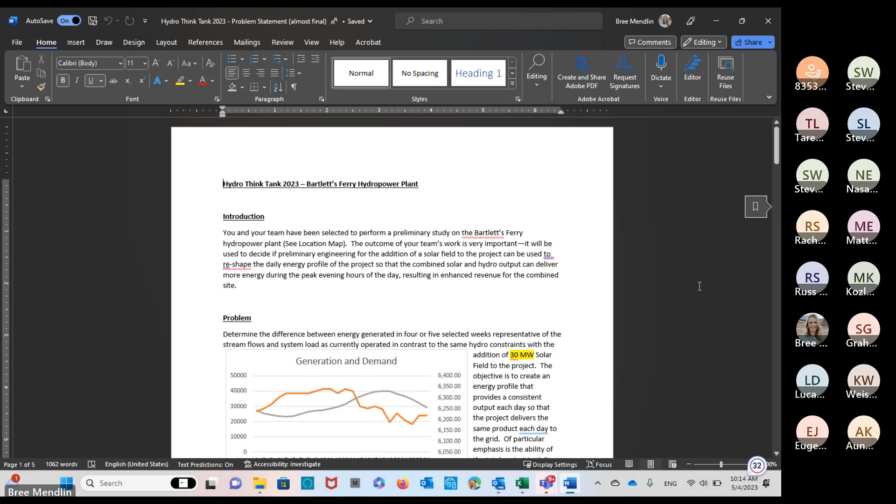Okay, I need to pull up something else. Sorry. Really did take some time to get ready for this. I'm just getting there. It's okay, it's early. Yeah.

Right, so click that. Okay, now we're all seeing the same thing, so I'm finally there.

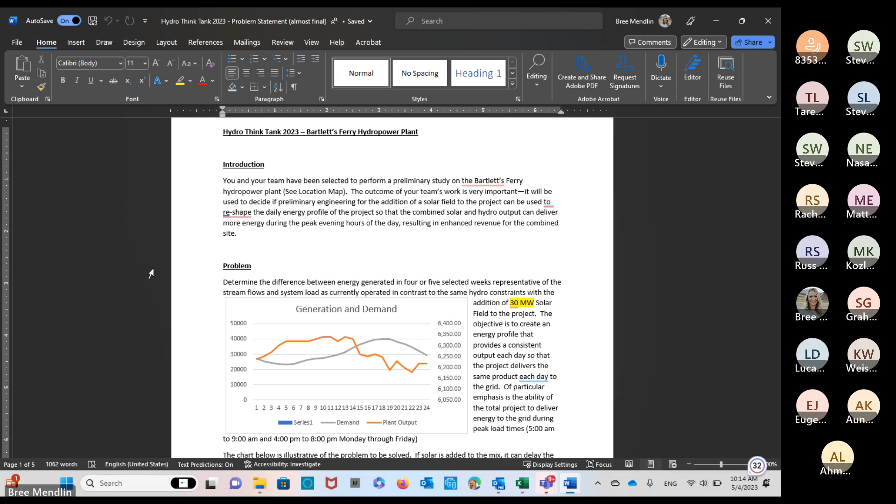Basically, the problem we're going to be asking you to take care of for us involves Bartlett's Ferry, a hydro plant that, as I recall, and Steve, you can correct me, is coming up for relicensing. So we're exploring some different ways that might be used away from the conventional side.

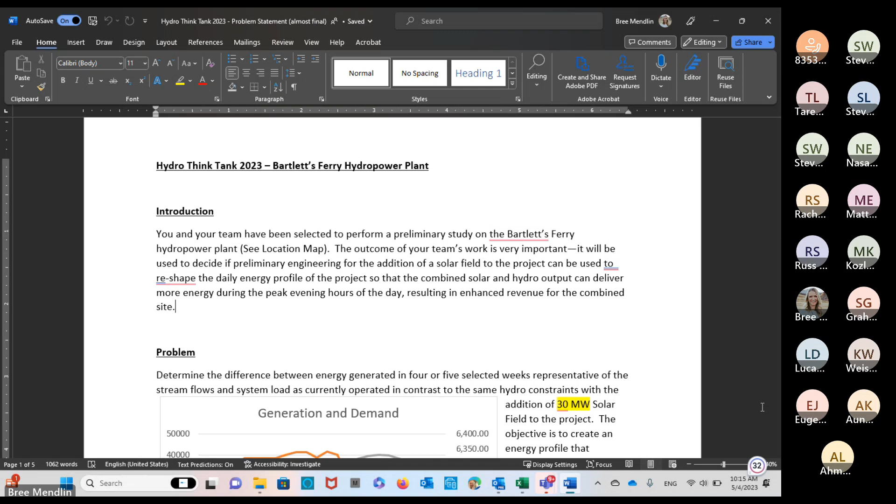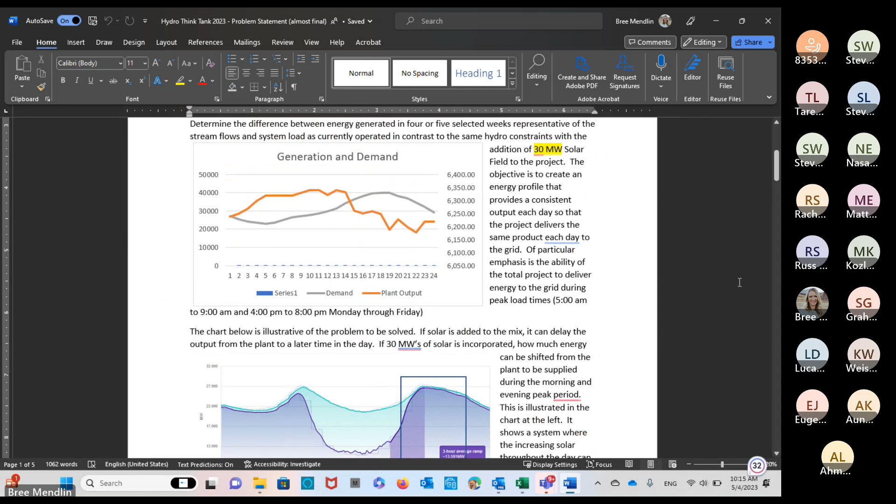One of the things we came up with, if you could just scroll down to the picture that says generation and demand. Not quite that far. There we go. So basically, what we're asking, and you can see the 30 megawatts of solar highlighted there.

Conceptually, there is a system demand reflected by that gray curve you see there, and then there's the output of a plant. You can see that those two don't really match up well. So what we're looking to do is add a solar field to the project.

Conceptually, now we're not actually doing this — this is your part of the study to try to ascertain how this might work. But if there was a 30 megawatt solar field attached to this project, how can we reshape that orange curve, the plant output, so that it better matches that gray curve?

In other words, use solar to help provide some energy, and then use the hydro plant to match up what's left, so that the orange curve comes down and matches up with that gray curve more closely. And this happens on a macro scale in places.

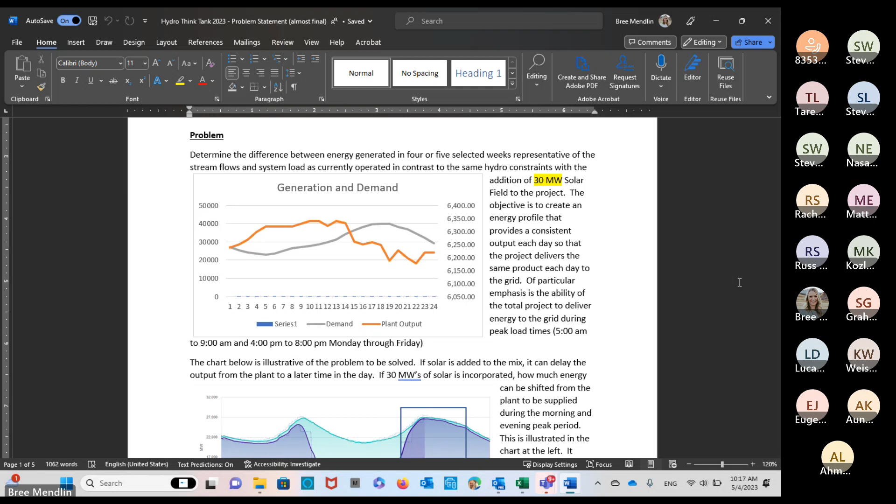Scroll down just a little bit further. Could you get that next curve there? That's good enough. So this is actually a clip out of the California Independent System Operator's website.

It's kind of interesting, but basically you can see the effects. The turquoise line, the higher of the two, is the actual system load, and the stuff in the blue or purple color below that is the generation mix of assets that come on. That gap in the middle is really the effect of the solar panels of all of California, and how effectively during the middle parts of the day they help meet the energy demand.

You can see how they can turn down the conventional plants. Those conventional plants might be hydro plants, gas turbines, or could be contracts that they're buying. There's lots of ways you supply power to a system, but you can see that gap that's created because of the solar that comes in.

The real challenge that happens in California, and one of the challenges that might show up here — we don't know exactly how this is going to look for your plant's output — but there's a sharp rate of rise, you can see the box there, required because the sun goes down relatively fast and people come home in the evening, so loads go up relatively fast. So there's a high ramp rate.

And then, of course, once the sun is down, there's still a number of hours in the evening that you're going to have to cover with your plant as you run it. So that's the essence of what we're trying to do. I can get into a bit more of it here in a minute, but just real quick, are there any questions about the basics of what we're asking you to do?

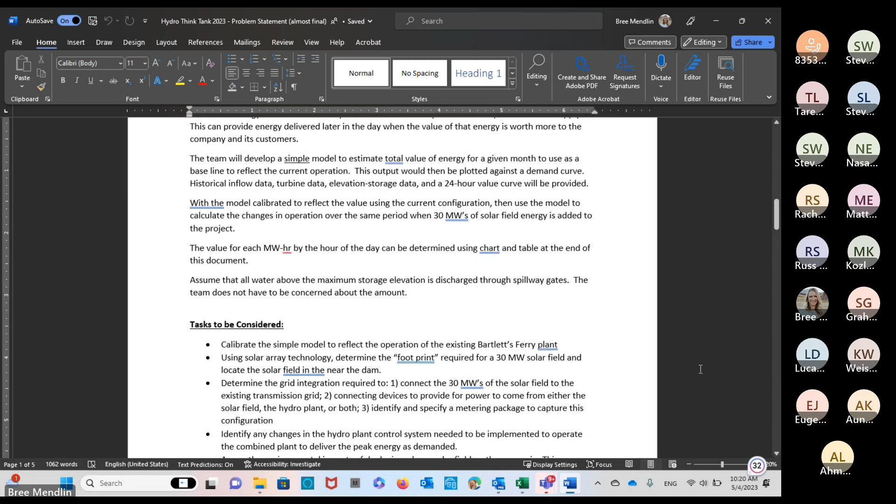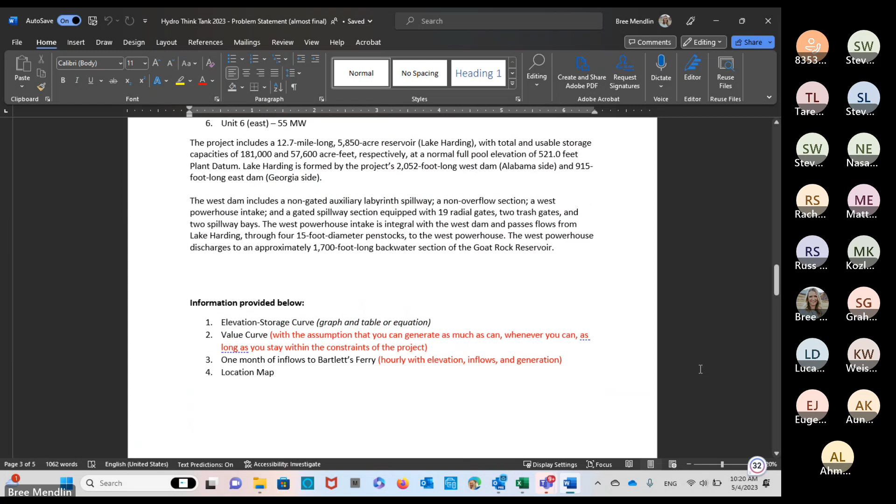I mean, certainly, yes. So scroll down a little bit further, Bree, and get down to the pictures and some of the other descriptions and stuff. Thank you. Yeah, keep scrolling. So, oops, there you can see the units a little further. Yeah, that's good. There's the descriptions of the units, how long the reservoir is, the storage in the reservoir, and so forth.

And so, yes, we do have more here. I think that's also some of the details that Bree was referring to that we need to probably check in on a few more things. But yes, there are more details. It's not that vague. I just kind of wanted to stop at the basics of the problem we're going to ask you to solve, because once this is done, then we've got to fit all the constraints, including the licensing and environmental constraints that this project has, because you're going to change the operation of the project. So one of the things that we'll ask for is some assessment of what that might mean to some of those environmental considerations.

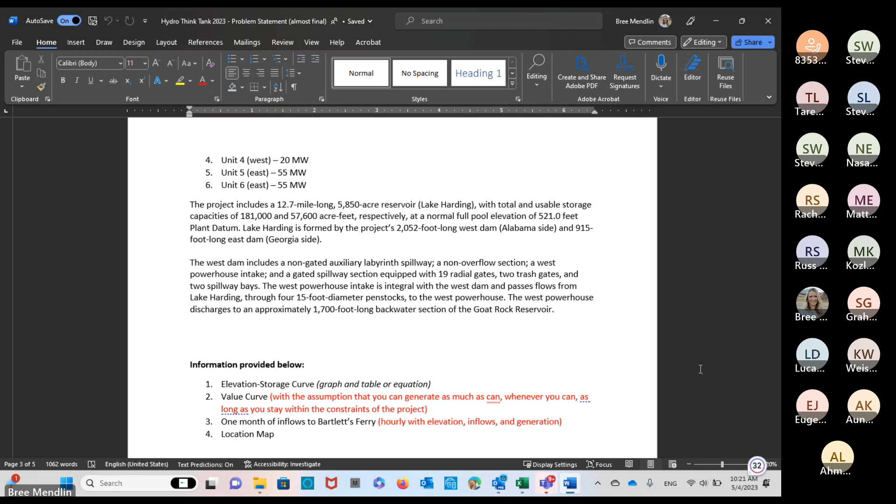Go ahead and scroll down a little bit further, Bree, to the picture, the map. There we go. So you can see where Bartlett's Ferry is in context of the river system, and there's several other projects around it. But we're only asking you to really look at Bartlett's Ferry. If you had two months to do this, we'd probably look at a riverine system entirely and look at all of the effects of changing the operation like that. But we're not doing that, just this project.

Any more questions? That was a good question. Thank you. Just one question. Can you go back and summarize it one more time? I got the part where you're talking about attaching the solar field to the plant, and I got the licensing part, but between that, I kind of lost you.

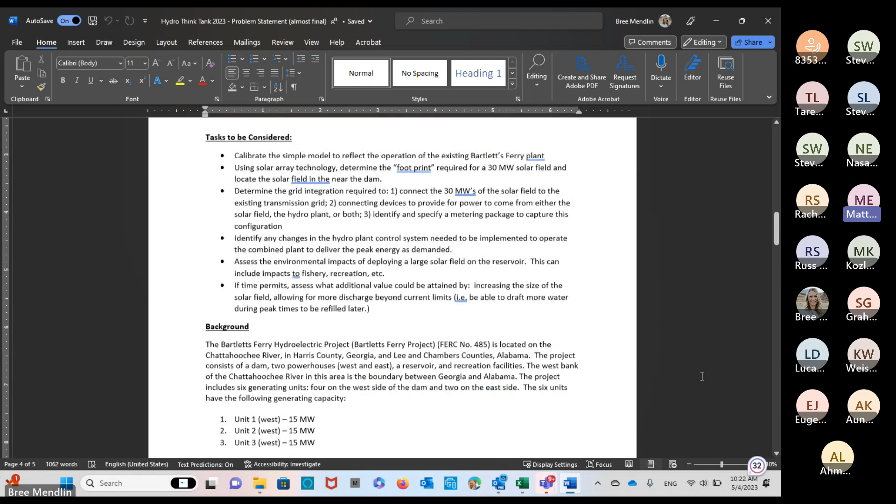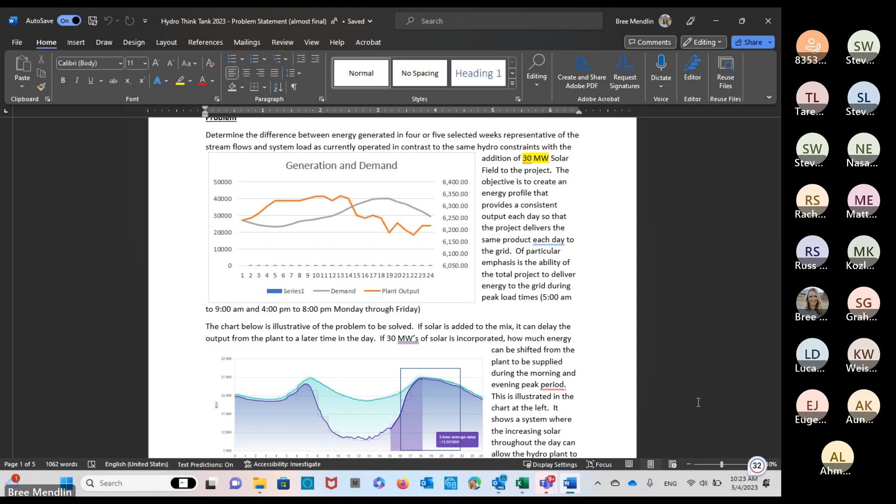And it's the same thing with the solar too, right? The output of the solar doesn't necessarily match the demand. It does during the middle parts of the day, and that's kind of what you see below. When the solar comes on, yeah, it can be used to match, but something has to go away. And then when the solar goes away, something has to come up to match it up again. So it's a gymnastics game that's played between controlling type of assets - typically gas turbines and hydro plants usually take that big regulation because they're the most flexible of the assets, hydro being the most, and natural gas fired turbines being also a very flexible asset, often take up the brunt of those kinds of resource mixes.

But you can also throttle down fossil units to make all this happen. Again, we're not looking for a big system-wide issue here, so we're just looking at the plant. So the two assets that you have are a solar field of 30 megawatts that isn't there.

You're going to have to figure out what it looks like, what the output would be on a given day. So you're going to have to learn a little bit about how solar works, the intensity of the sun, and the incidence and so forth.

You can make choices on the solar, if it's going to have a pivoting system so it kind of matches the rotation as the earth moves relative to the sun during the day. You can adjust the solar panels or you can keep them fixed. There's different things like that.

One of the things I think would be of interest here is there is a floating solar system that floats on the reservoir that might be really interesting, and given the developments around the plant and so forth, that might be a way to get the solar there.

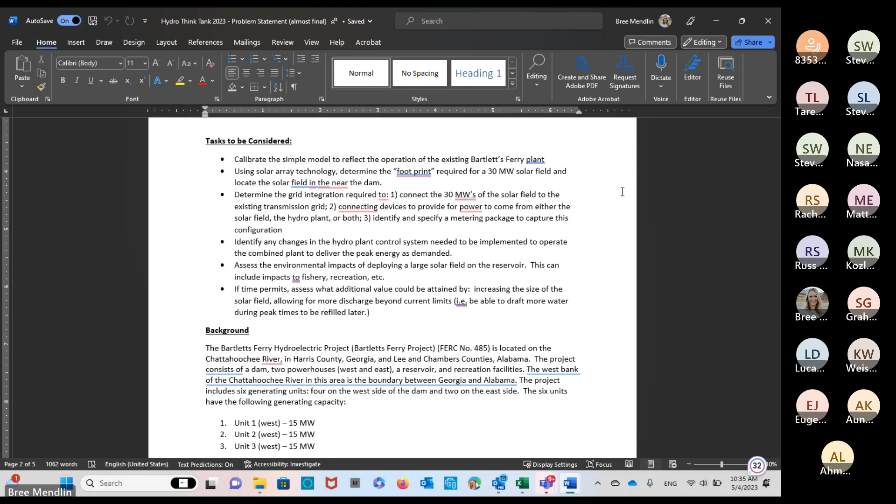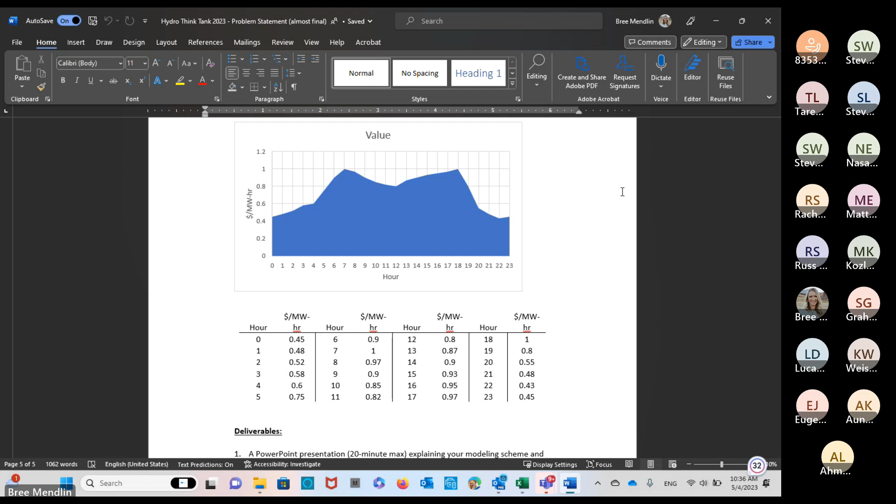It's just another piece of information that might be of value as you look at solutions and understand how the timing of those solutions works, which can help you make decisions or recommendations. And I think at the very bottom is a bit of the deliverables that Bree was just referring to.

I've been hanging back waiting to ask that question. As a consultant, we get the background of the project here, and talk about all the data that is available or will be made available. And that's the question that's been lingering for me: what do we need to produce at the end of this? This is good.

Steve, I think you've been working closely with Ken on the problem. I'm not sure if he was going to add any more detail to this. That's why we haven't sent it out to you all yet. We wanted to share it today, give you some ideas of what we're going to be asking for, but once it's completely final, we'll send it out so you'll have a copy.

Kenneth and I haven't had a lot of exchange on this lately, so I don't know if he has other information to add. There are a couple pieces we may want to look at, but effectively what you've been exposed to now is really the extent of the problem you'll be asked to evaluate and give your recommendations on.

Okay, great. Thank you for confirming that. Does anybody have any questions about anything at this point, like the competition itself, the problem, or logistics?

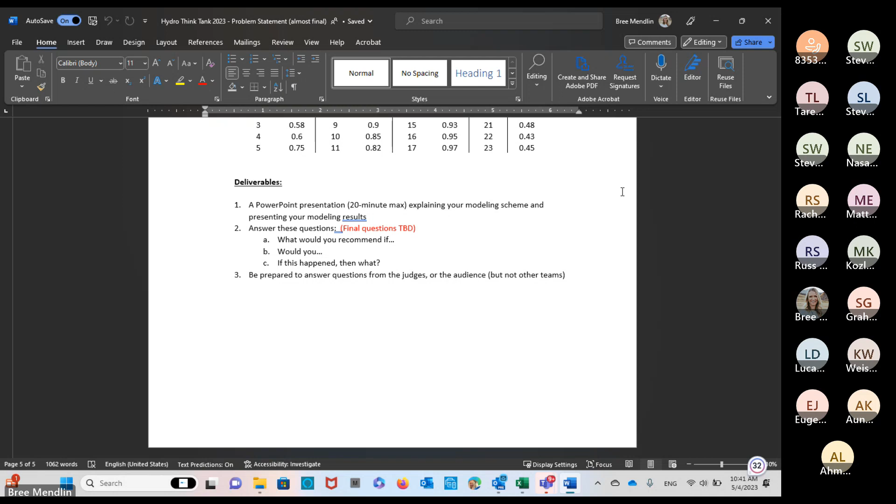The project was relicensed back in the early 2000s, so it's not coming up for relicensing anytime soon. But if there were to be a major change in its operation proposed, then Georgia Power would have to apply for a license amendment. This is the Chattahoochee River Basin, and it originates upstream of Atlanta with Lake Lanier, which is a large water supply reservoir for Metro Atlanta.

The system includes about 5 Corps of Engineers dams — very large dams operated by the Mobile District of the Corps of Engineers. Bartlett's Ferry Dam is one of several Georgia Power dams on the river upstream of Columbus.

Upstream of Bartlett's Ferry there are a couple of small dams, Langdale and Riverview dams, and Georgia Power is actually going through a process to decommission and remove those dams from the Chattahoochee River right now because they're no longer serving a useful purpose — they're so small.

You can see West Point Dam is the dam upstream near LaGrange, Georgia, and that controls the flow into Bartlett's Ferry. So that's one of the constraints on what water is available at Bartlett's Ferry Dam to generate — how they operate West Point Dam upstream.

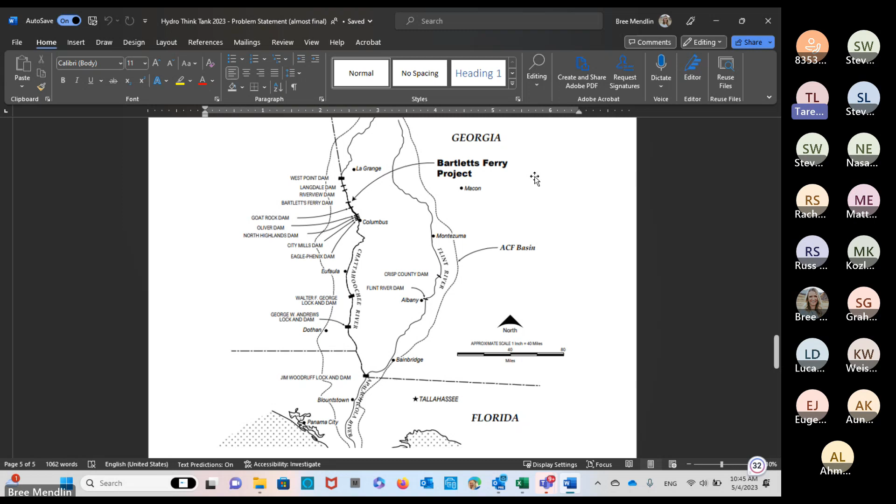Yeah, I got a question about the very first slide. When you see the relation between the demand and the plant output, what do you guys do when the plant output is more than the demand? What do you do about this power? Do you tie electrically with some companies that you actually give them this power, or is it being wasted, or what?

Yeah, so this is a bigger question. What we're trying to do is just match that gray curve to the plant output. There are different scales on this, but in the real world, this singular plant would be nowhere close to that gray curve, just to be clear on that. This is a plant of a few hundred megawatts trying to meet a system demand of several thousand megawatts. So in the real world, this plant would never exceed that.

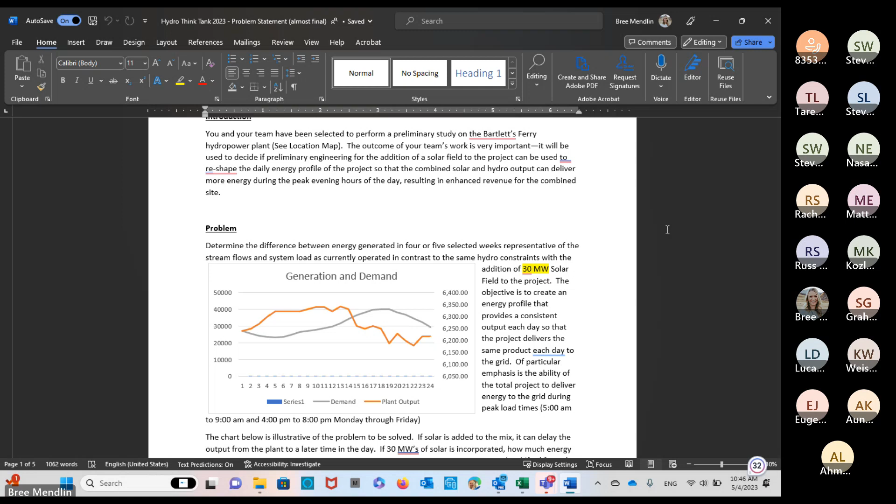But in the real world, there are times where you have more resource perhaps than what demand is. And what happens—scroll down a little bit, Bree, to that next chart, because that's really what you need to see—is you have to back off something. So this is a case where I've got more resource available than demand on my system. And so what they do here is they back down conventional resources. They start shutting down hydro units, perhaps shut down gas units, and maybe if they've got a lot of wind blowing, they may curtail wind or even curtail solar if they have control of that, to match that up.

And then what in fact really happens is, and it's hard to see, but there's a lot of squiggle in that line. It looks kind of like a regular line here, but there's a lot of fluctuation in that line, and so there's a constant balance also going on. So you've got hourly balances and moment-by-moment balances and everything. So in the real world—and I hope I'm answering your question.

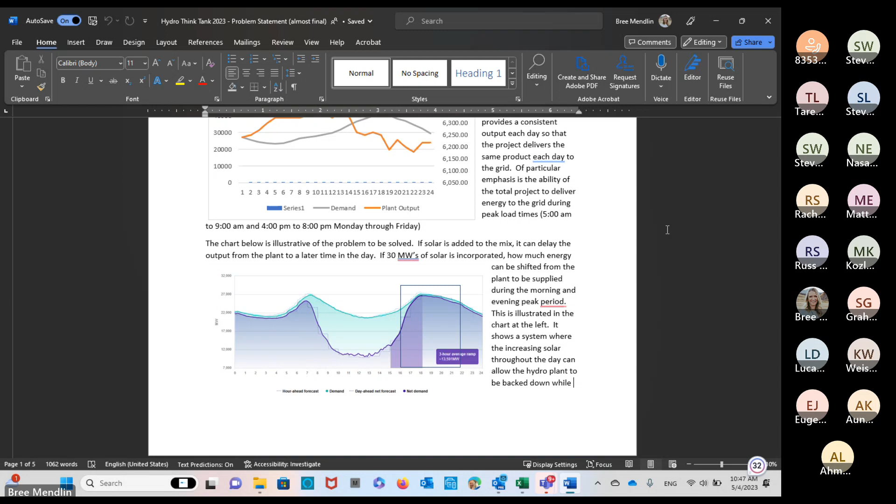So what would happen is, to make that orange curve work, we'd shut units down to bring it back down to that demand. This curve was just created as an illustration as much as anything. It seems like just using the eyeball as an averager, I could reduce that orange on the front end and fill it back up on the back end, and you could match it up pretty closely to that gray curve. I could probably reduce it in the morning hours and increase the output in the evening hours, and then overall have about the same amount of energy out of the plant, but match much better that demand curve.

Does that make sense? Yes, it does. I'm just considering the concept of optimization to go along with the solar array that we're going to install. You see what I'm saying? So we try to get things to help together. That's why I'm asking this question.

Oh, it's a great question. I think it might help to picture the gray curve in this context as maybe a local demand or a regional demand. Think about the microgrid concept, right? If you've got a little grid that's islanded from everyone else, you've got a couple of towns and this hydro plant and a solar plant, kind of isolate the problem with that kind of mentality.

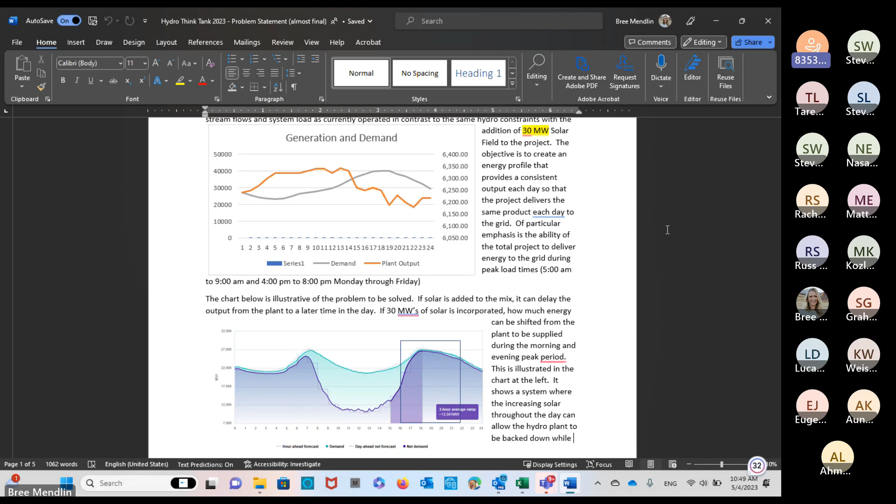Okay, hearing none—and that doesn't mean you can't ask questions as we continue on—but I do want to allow Lucas some time to give us a little Hydro 101, and that I think will also help answer some of the questions that might be floating around in your head as well. So Lucas, if you are ready, I will stop sharing and you can share your screen if you have slides. Sure.

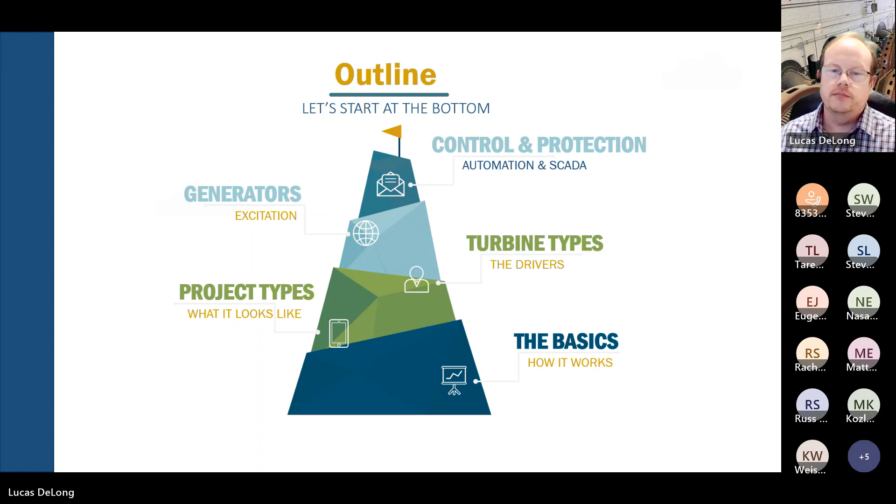Back to middle school earth science, right? Hydro is renewable because the hydrologic cycle is what drives the system. We have water evaporating and transpiring from lakes, rivers, and the ocean, then transported via sometimes atmospheric rivers - that's been making the news a lot - to places where precipitation brings it back down to earth, then transported terrestrially in our rivers and groundwater so that we can make use of it. It's free fuel. All we've got to do is capture it.

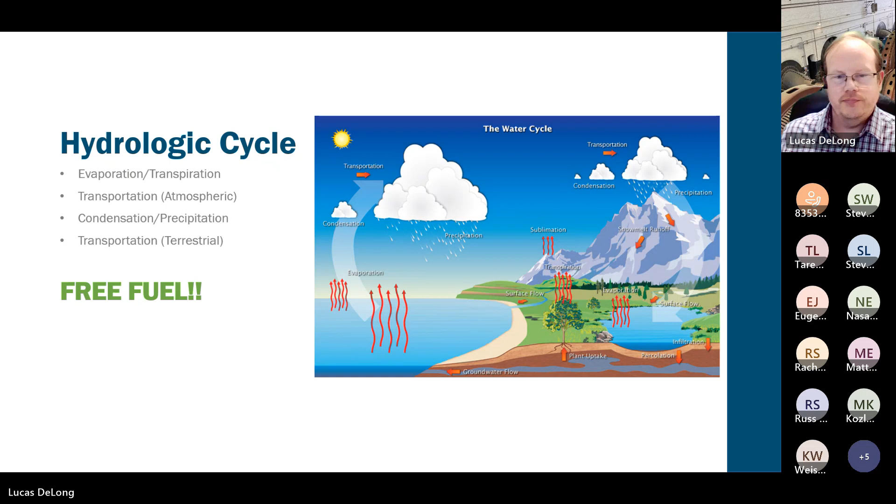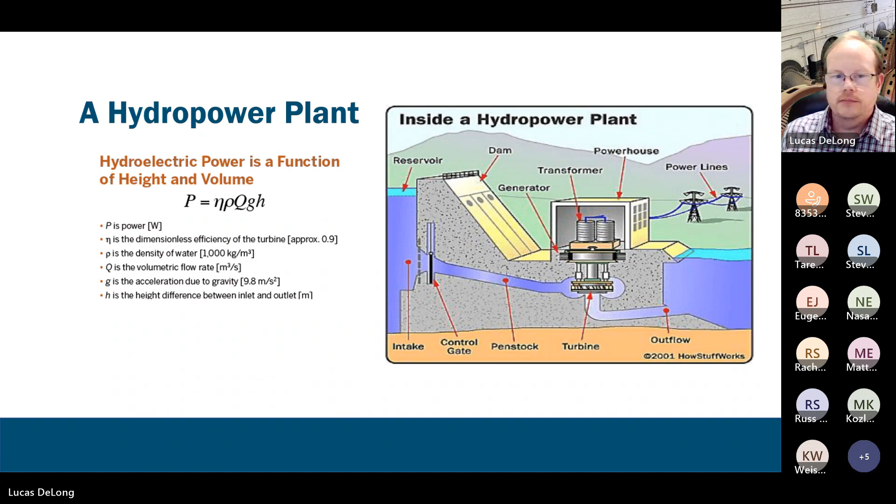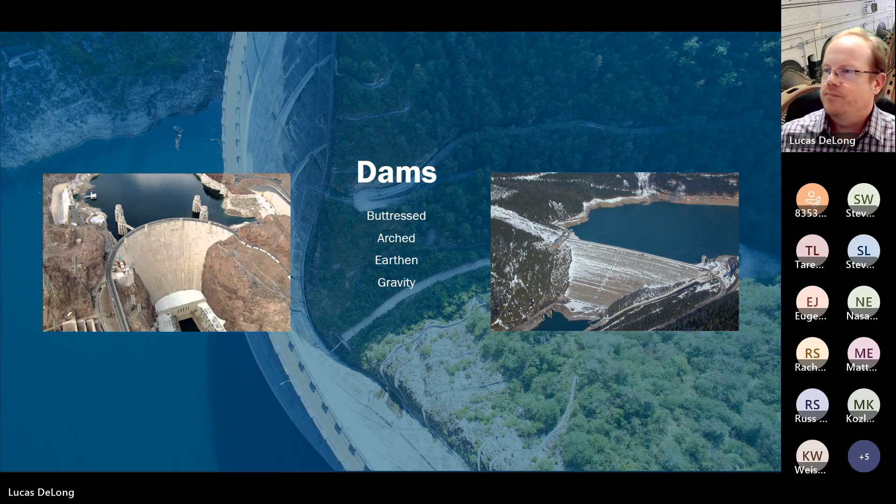Dams are going to have spillways because the water has to flow over them or through them. Usually the through is through the powerhouse, right? But we need capacity to spill water that we can't put through the powerhouse. Usually that's because the powerhouse isn't designed to take the river's complete flow all of the time - it wouldn't be economical to build a powerhouse that could do that. So the extra water, when there is extra water, needs to be spilled over the dam or through the dam.

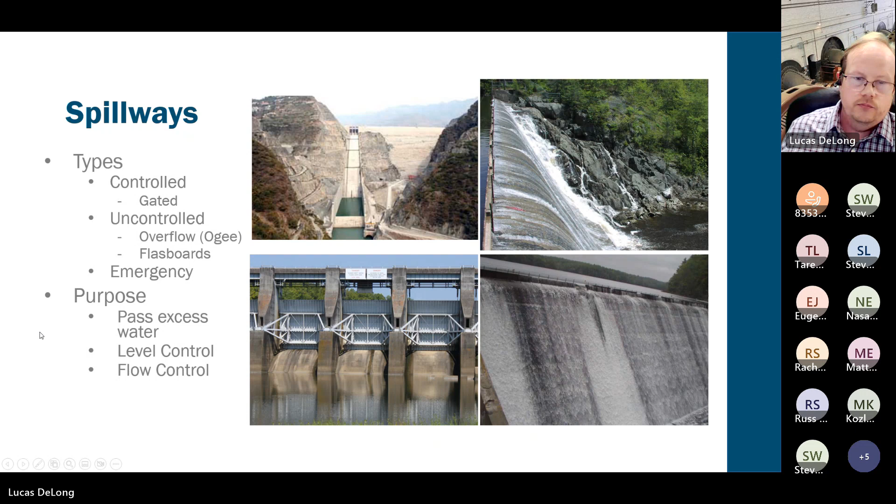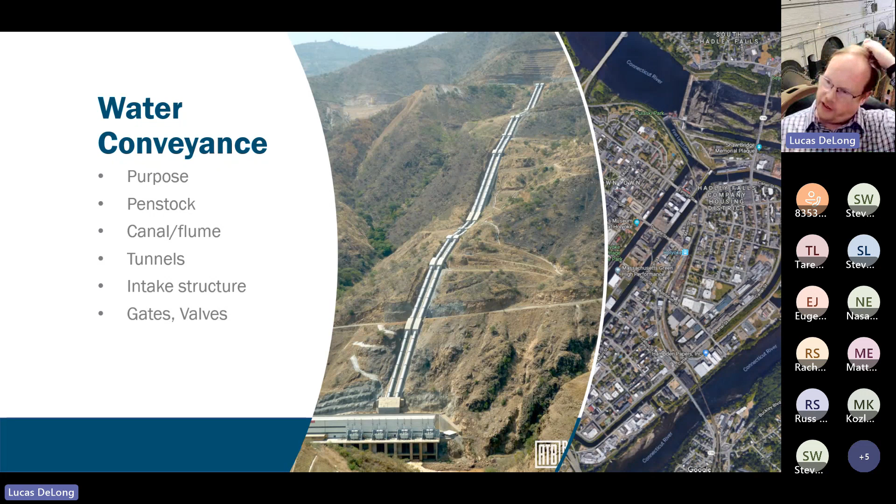Let's talk about water conveyance. It's kind of a fancy phrase, but it is what it sounds like. It's a means to get water from one place to another. Usually when we're talking about water conveyance, we're talking about how we get water from the head pond or the upper reservoir to the hydro station.

So two good examples are pictured here. On the left photo, we have what's called a penstock, a really big pipe, taking water from an upper reservoir, probably through these series of pipes. And you'll notice that in between these sections of pipes, there are these massive concrete blocks. Those are to hold the pipe in place, obviously, under the force that the water would exert on it as that water makes its way around directional changes in the penstock.

This looks like a particularly tricky and steep one. We can also get water from A to B via canal. That's a very old school way to do it. This photo on the right is of Hadley Falls in Massachusetts. This is a very old mill complex where you'd have several mills along the canal that are all each doing their thing, taking a little bit of water off and returning it to the river downstream.

Tunnels also, often you'll see tunnels and penstocks combined, especially if you have a very high head site or a site where the upper reservoir is just far away from the hydro plant. Tunnels could be just tunneled through rock, or they could be lined with concrete. Obviously a costly and complicated endeavor.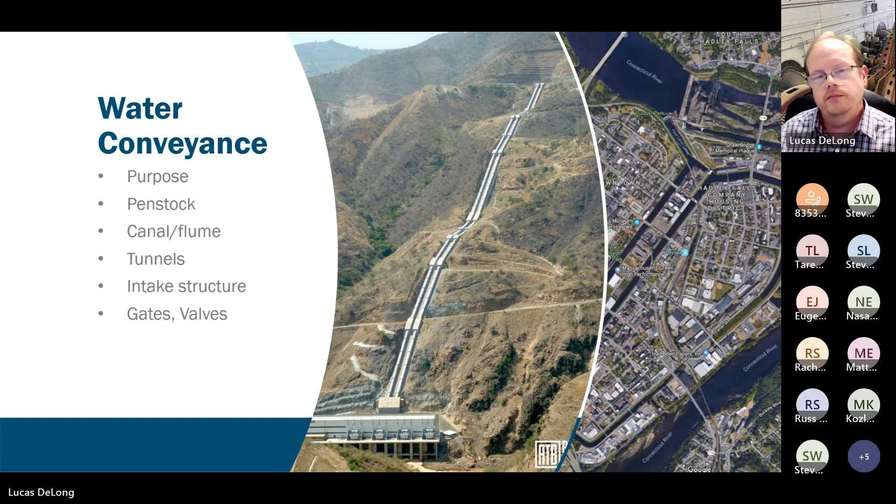A storage project is one where you can store some energy and cycle the plant. Whereas a run-of-river project is kind of what it sounds like: you take the water as you get it and put it through your plant. A pump storage project is...

Again, not quite parallel to these two, but a different type of project where you're able to move water from the lower reservoir to the upper and vice versa, taking advantage of low costs when demand is low and producing power when demand is high.

We can further divide hydro projects into three categories with regard to the hydraulic head at the project. We talk about projects as either high, medium, or low head, and there are different equipment considerations that come with that, particularly the turbine type. We'll talk about those in future slides.

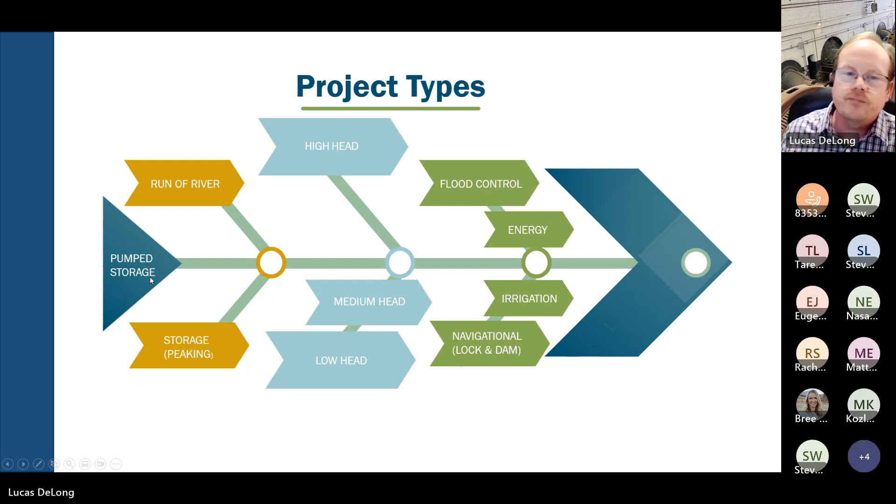So a run-of-river facility is allowed, and this gets back to the discussion of constraints. Your category of facility is one of your constraints that is usually tied to your license. A run-of-river facility will, in its license, have very little range of operation for the head pond. And that head pond is your storage. The amount that you can raise or lower your head pond is the amount of storage that you have. So on what we refer to as a run-of-river facility, flow in equals flow out for the most part.

Because you have to take what you get and generate with the water that comes as it comes, it is variable, much like other renewable resources. It's going to be more predictable than solar or wind. The weathermen are better about predicting river flows than they are maybe about forecasting sun and wind, particularly since river flows tend to be more hour by hour or day by day than minute by minute.

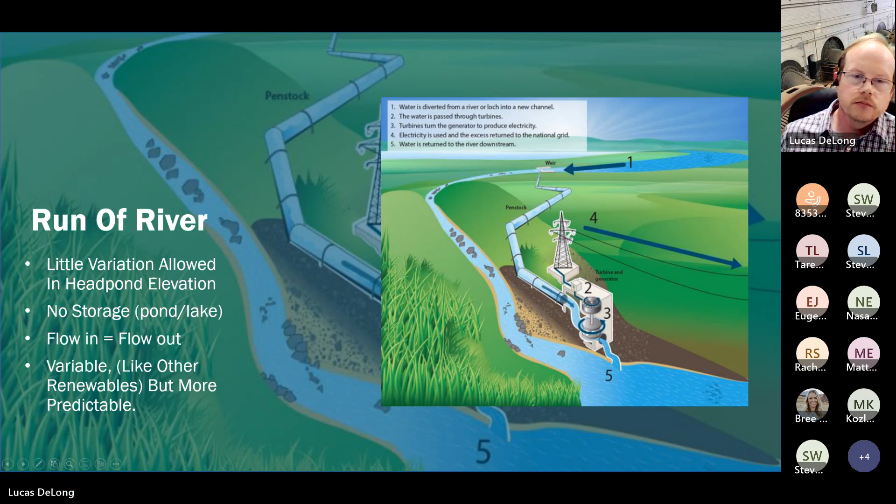A storage facility is allowed in its license a wider operational band for its upper reservoir, and it is usually cycled up and down daily and seasonally, often serving a dual purpose. The seasonal variation would be more for flood control than for matching demand curves, which is what the daily cycling would be about. So you'd store water up at night, run your generators during the day, or as solar becomes more prevalent, run your generators in the morning and in the evening and shut them off at noontime.

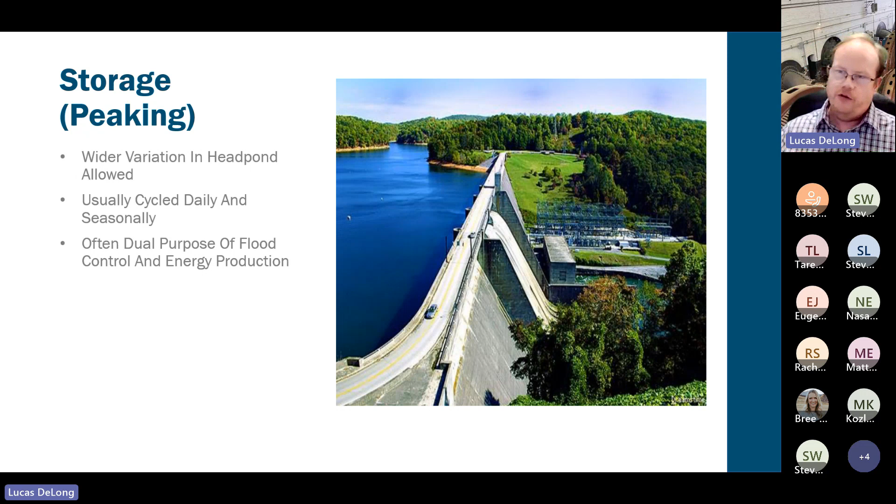Pump storage is a rare bird in that there aren't a lot of them. They're very large, at least conventionally, and they make up some huge percentage of energy storage on the grid today. They're difficult to find a site for, especially given modern environmental requirements.

Often you find that these grew up alongside a nuclear plant, and again that gets back to the word Steve used: flexibility of the resource. You can ramp and turn on and off a hydro plant very quickly. You cannot ramp or turn off a nuclear plant very quickly.

So while the nuclear plant sits chugging along, satisfying base load for a region, the demand drops off at night, the pump storage facility will start pumping, providing a load for that plant and taking advantage of that cheap electricity to store energy in it from the lower reservoir to the upper reservoir, moving water from one to the other. During the day, when prices are higher, the pump storage facility will turn the pump around and become a turbine and generate electricity to supply the increased demand.

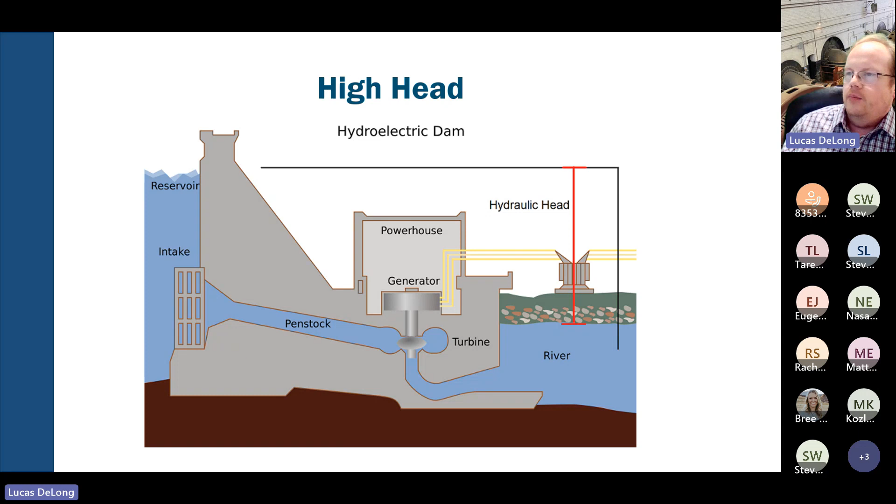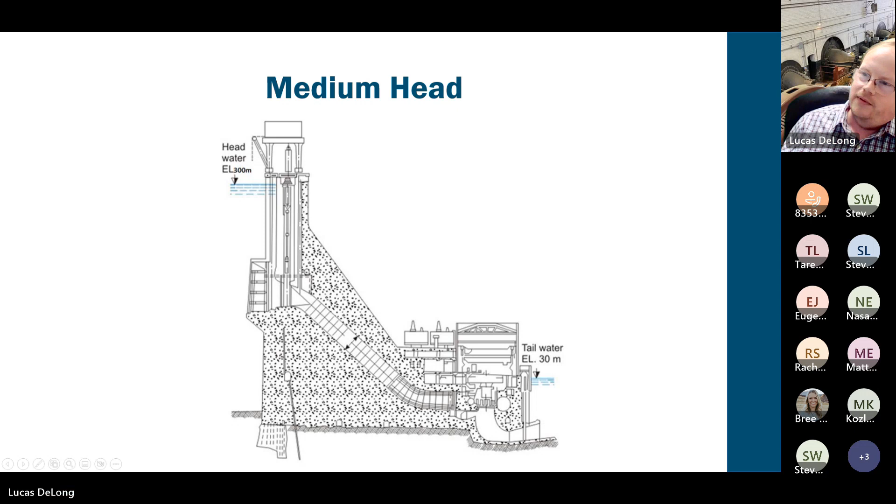And then low head. So all the fun is with low head. And I say all the fun because I mean all of the innovation seems to be around finding economical solutions for low head applications. There's not a whole lot of project sites available where we can develop new high and medium head hydropower projects—they've been developed or won't be developed. But there are plenty of existing dams across the country that have, let's say, between 10 and 20 feet of head that could be developed if there were the right set of economic and environmental circumstances.

So you see pictured here two examples of low head solutions. This S turbine is a pretty common solution where you've got a horizontal shaft machine and water flowing through a turbine that's maybe got adjustable blades—this would be a Kaplan turbine probably. But the challenge here is this is horizontal because it minimizes the civil costs of construction of the powerhouse. You don't have to dig as deep a hole to install this horizontal machine. On the right, you see an Archimedes screw. We'll touch on that again in a little bit.

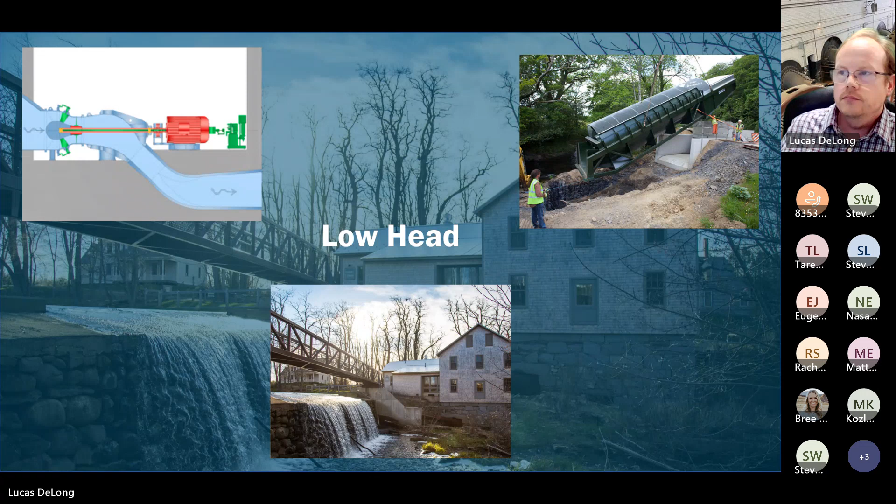So in the category of low head, usually you'll find lock and dams. I threw this in here as kind of a subcategory of low head sites to give you an example and illustrate maybe the problem with developing hydro plants on existing sites and operating a hydro plant on an existing site with a lock. There's a lot going on here in this photo—they're a busy place for commerce, marine traffic, and often they're relatively low head sites, and that makes selecting economical equipment a challenge.

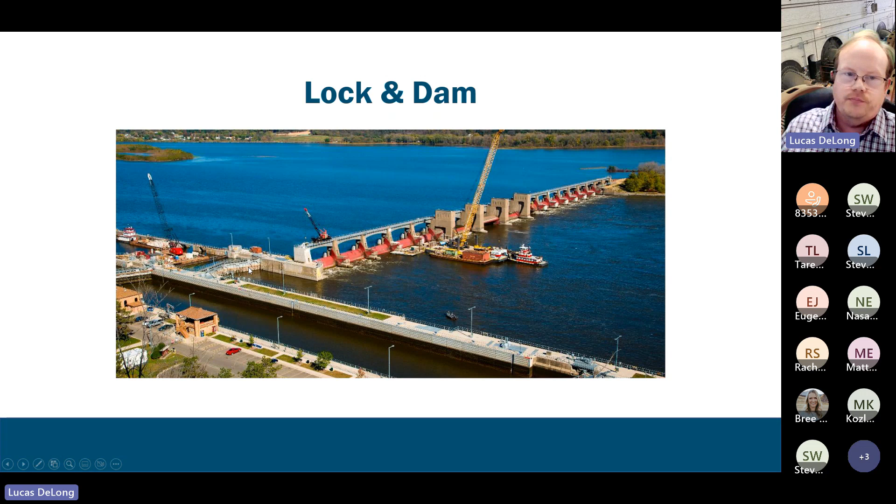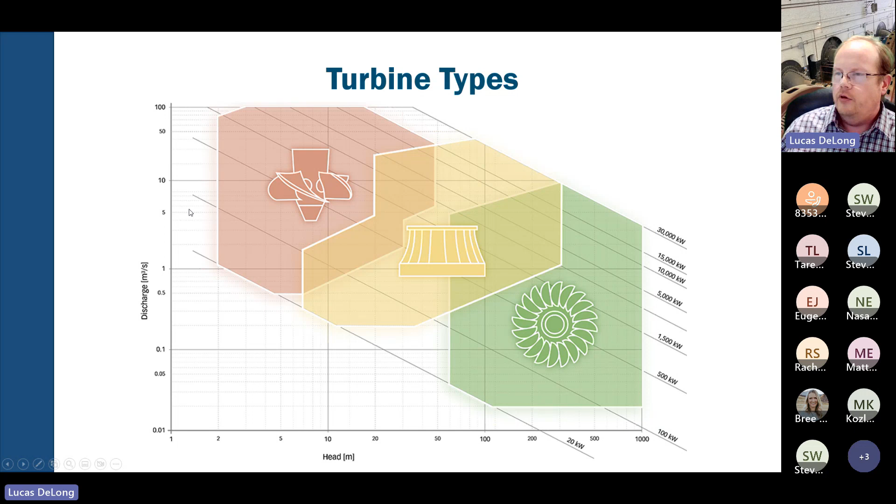So we'll take a closer look at each of these. Start with the Pelton turbine.

This is an impulse turbine, meaning we're spraying high pressure jets of water at these buckets. Picture a fire hose trying to turn this turbine. That's the idea here. The water, as soon as it hits those buckets, is deflected and returned to a tail race with a whole lot less energy than it had, with that energy being transferred into kinetic energy in the turbine.

That water jet is usually, maybe it's one water jet, but more often it's a set around the perimeter of the turbine, and you can control the power into this turbine by turning jets on or off, and also by throttling the amount of flow through that jet with usually a needle valve.

The Francis turbine is a reaction turbine. This turbine is wet all the time, whereas the Pelton turbine, again, the water's splashing off it, it's operating at atmospheric pressure. Whereas with a reaction turbine, you have high pressure water on the top side, and low pressure, perhaps a vacuum below the turbine. There's no air happening in here, and if there is, that's a bad thing.

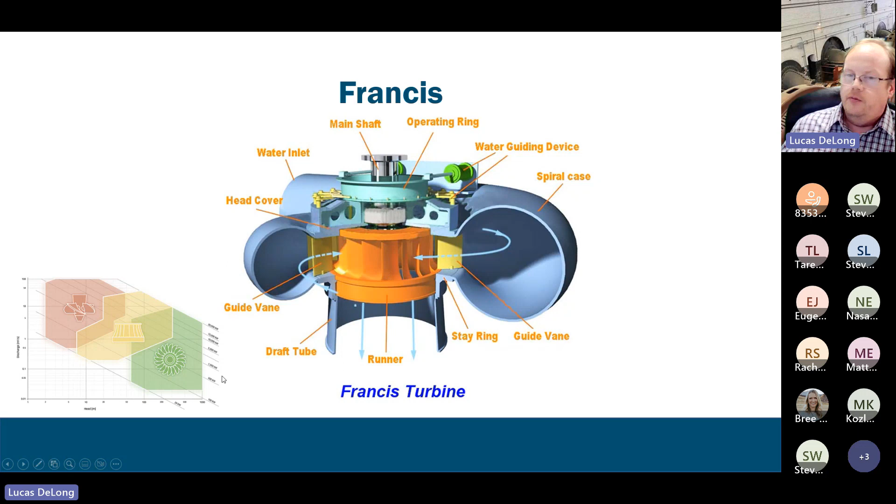Kleinschmidt and me in particular, we're well experienced with Francis and Kaplan turbines. I personally have not run into very many Pelton turbines, being on the East Coast particularly. Again, Pelton turbines being well suited to high head sites are going to be more on the West Coast.

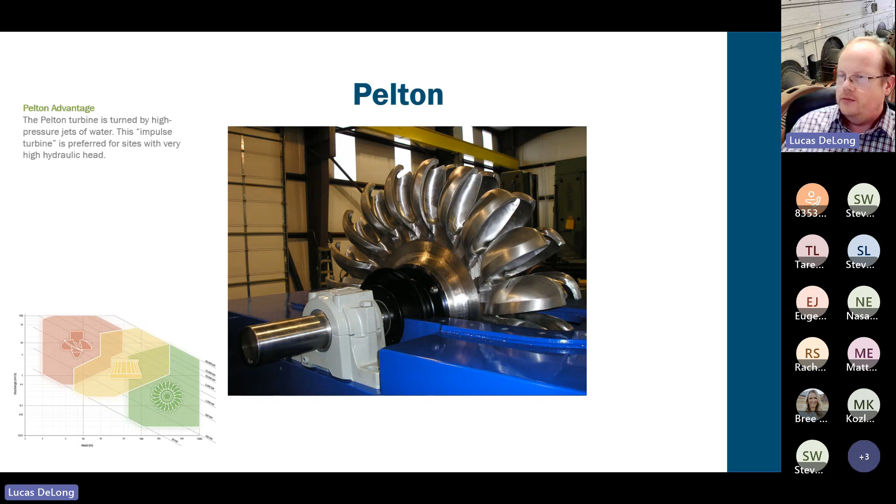The important thing about a Kaplan is that the blades themselves also rotate. And so that ability of the blades to rotate helps control flow or change the reaction of the turbine, which improves efficiency over the range of flows that can go through the turbine.

That results in a much flatter efficiency curve close to 0.9, whereas with a Francis turbine, you have a very steep efficiency curve where the turbine is most efficient at, let's say, 80% of its rated flow.

So with a Kaplan turbine, you can get a wider range of flows through the turbine at reasonably good efficiencies, whereas one might tend to want to operate a Francis turbine as either on or off at best efficiency. There's less room for economical throttling or adjustment outside of, say, a range of maybe 60 to 100%. You wouldn't turn it down much beyond 60%.

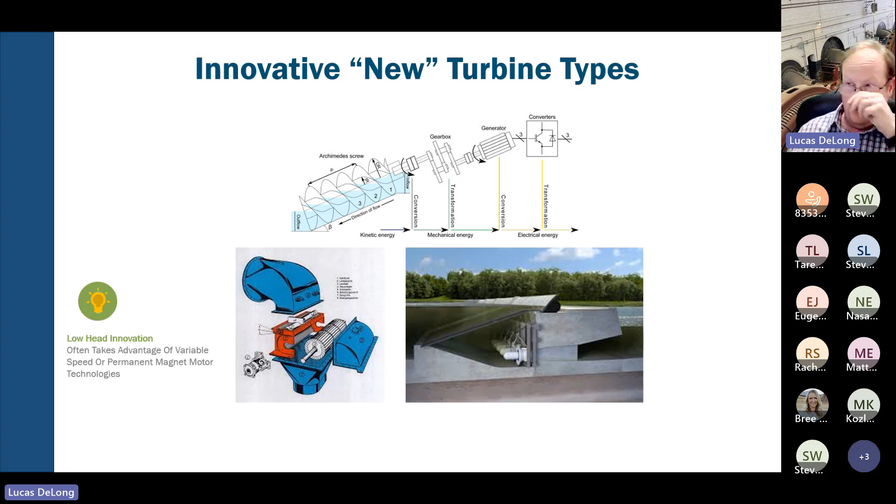Cross-flow turbines are another type you'll often see with low-head projects. Pictured here is a submersible bulb turbine - something like a Kaplan turbine, but with fixed blades for simplicity. This is a particular manufacturer's modular solution. As with anything, making something modular and offering a menu of solutions for a variety of applications is one way to cut costs. If you can take ten of something and install them because that suits the application and that's the size available, that's probably more effective, especially for low head sites, than developing two turbines specifically for this head and this flow. So when I talk about an application of a hydro solution or turbine, we're talking about those two parameters - the application is mostly defined by the head and flow available in the river.

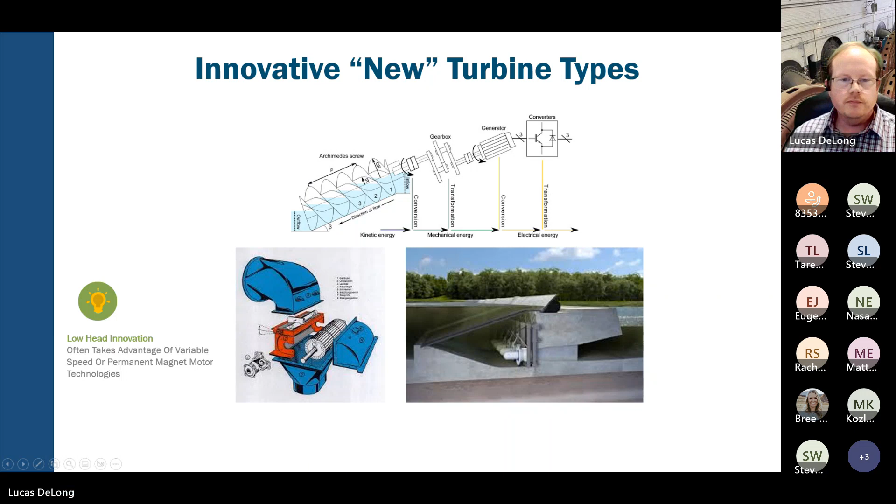So let's talk about the generator - that's the exciting part, no pun intended. You guys still awake? Yes, yes, yes sir, thank you.

So we've been talking about the turbines and the water, and we've got a shaft that connects that turbine to a generator - that's how we convert mechanical power into electrical power and energy. Sometimes that shaft will pass through a gearbox, particularly to solve economic problems in low head applications, because a turbine must turn slow and a cheap generator turns fast. A generator that turns slow is much more expensive than one that turns fast.

Typically when we're talking about hydropower, we're talking about synchronous salient pole generators. Salient pole meaning the poles are individual and stick out - we'll see that in a second. Synchronous meaning the rotor, attached to the shaft, is rotating synchronized with the electric grid, meaning there's no slip as there is with an induction motor. The typical synchronous hydro generator has a field winding and a stator winding. The stator winding is the armature, and the field is on the rotor.

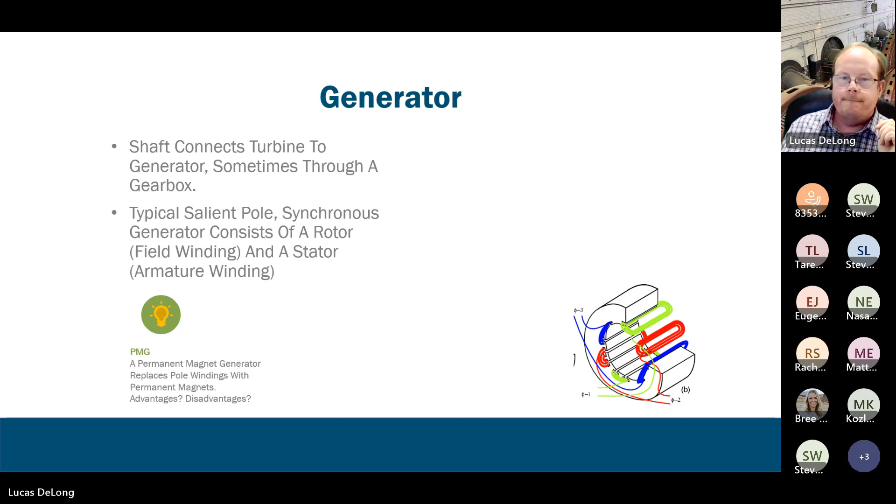So instead of a field winding with an electromagnet on that salient pole, there's a permanent magnet. There's my salient pole and the winding on that pole, and the pole head that keeps the winding from flying off. Here's a good 3D example of how these salient poles are wound, and if you follow it closely you'd see these alternate polarity with the direction of the winding.

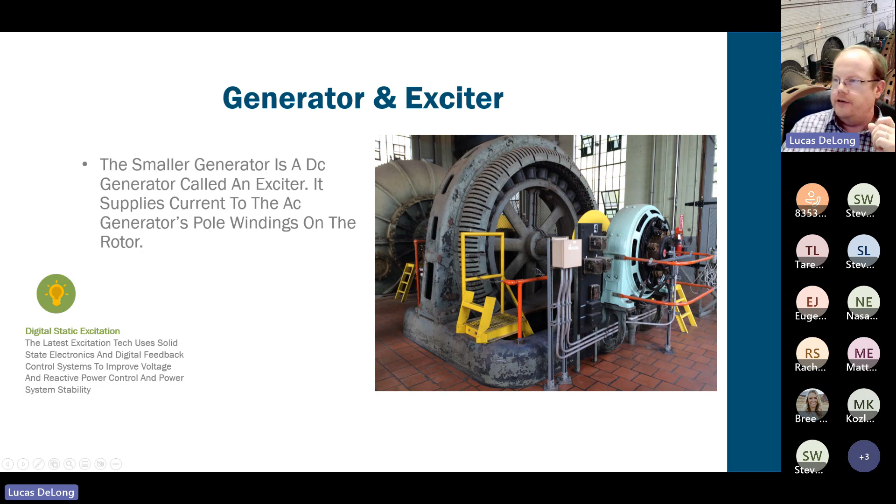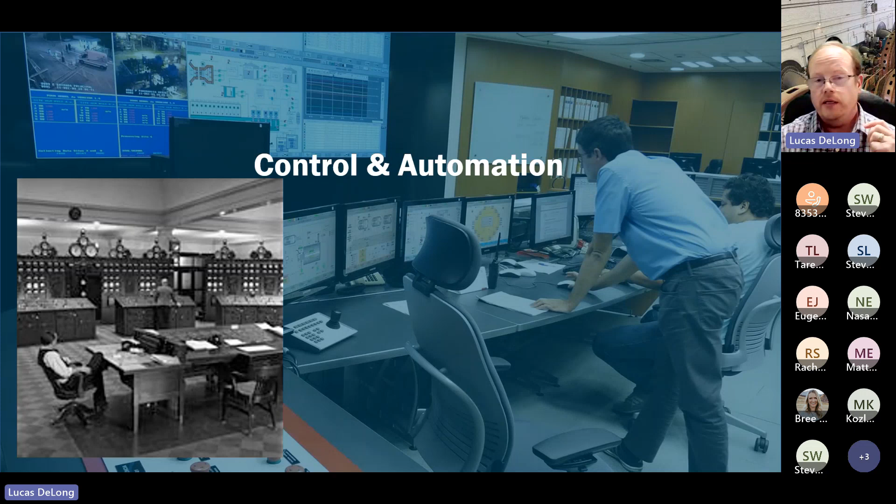So yeah, I guess I want to reinforce that point: you can have automated control at different levels in hydropower or anything. You can control things locally at the unit. You can control things centrally at the hydropower control room. If you've got 8 units, you can control them all from the one room, from the bench board, or from your desk and human machine interface PC.

Or you can use SCADA, that's supervisory control and data acquisition, in a wider area to perform maybe more limited control functions at multiple plants. So you might be able to sit in a regional office and start and stop a generating unit, or change its power output set point from 80% to 60%, or change its mode from manual operator control to an area regulation control, where you're getting a set point from the utility's central command, if you will.

I think that covers that. And then there's protection. These are obviously very expensive assets that owners want to protect and monitor. We want to protect them from themselves, as well as conditions outside of the plant. So this breaks down into 2 major categories. You've got electrical protection, which is kind of what I think of first when I hear the word protection all by itself.

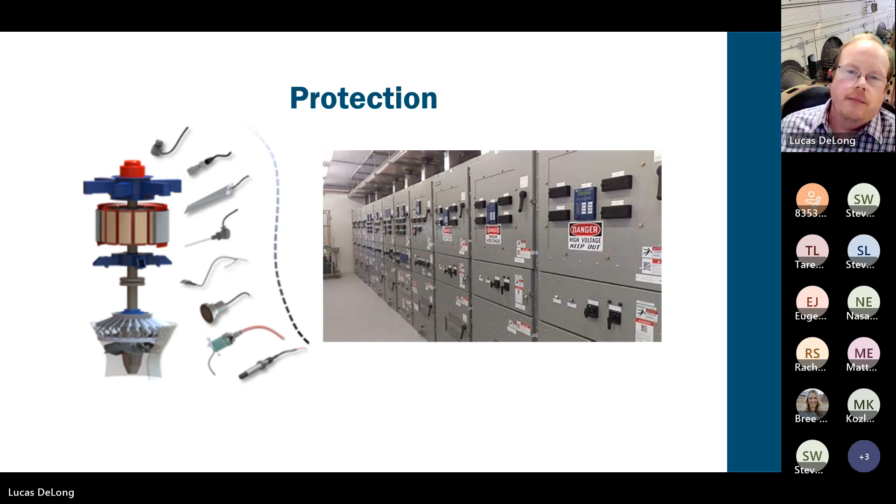That is all I have prepared. I would be happy to entertain questions or go back to slides and discuss any questions you guys have.

Well, I learned a lot. I always learn a lot from these Hydro 101 sessions, so I appreciate you going into this detail. Does anybody have any questions for Lucas?

Yes, you said that it was not economical to use the entire flow of the river or the water source. I want to know why it wasn't economical.

A couple of reasons. Usually the maximum flow of the river is something that happens very infrequently - we hear terms like the 100-year flood. It wouldn't be impossible to build your powerhouse big enough and include as many turbines as you'd need to take advantage of all the flow the 100-year flood has to offer, but you'd have 99.9% of the time, one out of your 20 turbines sitting there doing absolutely nothing, or maybe 5 of them.

And that gets to analysis of the hydraulics of the river system, flow duration curves, exceedance levels. But typically when sizing a hydropower plant for a river, you'd be looking to cover about 2/3 exceedance - somebody correct me, Steve, you got a better number? Somewhere around 2/3, yeah, you pegged it.

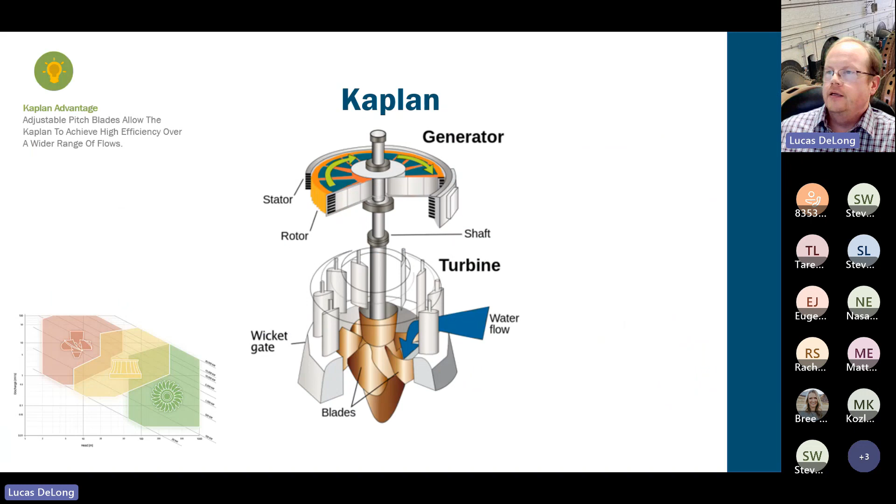So you're either going to have a pump turbine that's specially designed to pump in one direction and generate in the other. Or there are other arrangements where you could have a pump and a turbine on the same shaft and control flow with shut off valves and gates accordingly. And there are even conceptually these days variable speed technology that could vary the pumping much like a VFD would with a small pump, so that you could vary load, not just generation, because you can't throttle the pump in the same way that you can throttle it as a generator.